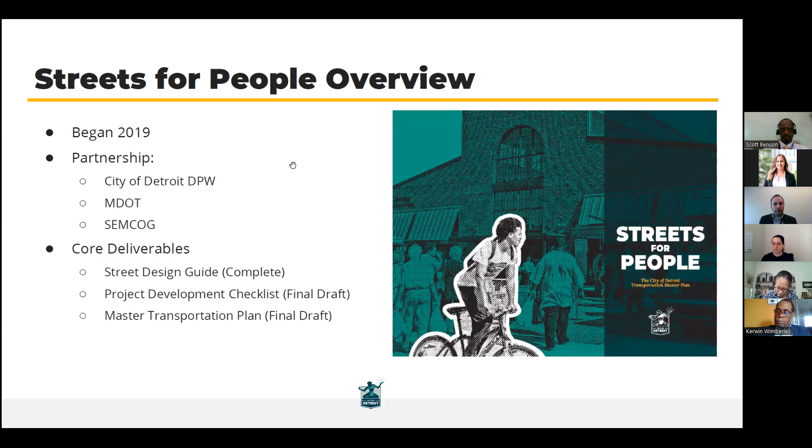The plan is divided into four main sections. First, establishing where the city of Detroit is going in terms of transportation and mobility, and where we are today—what has led us to the streets and rights of way we see every day. Second, where do we want to go? What have we heard from community members and stakeholders about what they'd like their streets to look like and how to use them. Third, how do we get there? What actions, recommendations, and efforts can be taken by various stakeholders, including the Department of Public Works, to make it happen.

Oh, did I see a hand raised? Oh, okay, sorry.

There were five core values established throughout this process. I won't read them all, but they're available on the website if you want to dig into how they were developed. They focus on safety, especially pedestrian safety, first and foremost; making sure our streets contribute to a prosperous economic environment; ensuring equity, dignity, and transparency in how we use our streets; making sure access is equitable so people of varying abilities have the same right and access to public facilities; and making sure the relationship between streets and public places supports health, healthy lifestyles, and access to our riverfront environment. All these components should be reflected in how we design, operate, and maintain our streets.

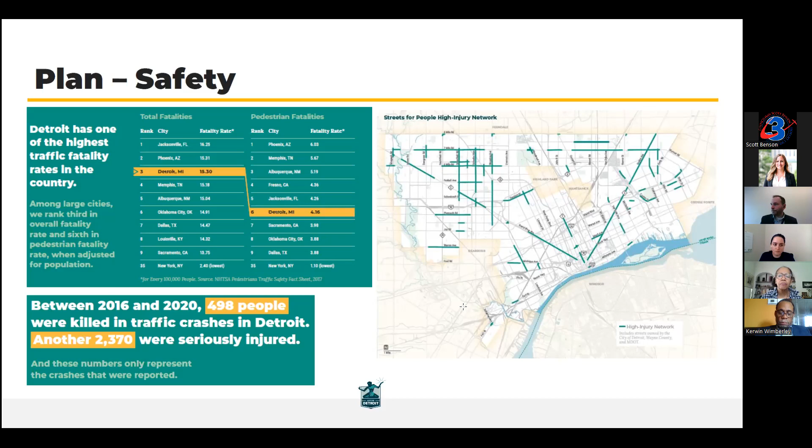The plan also identifies several ways of measuring equity and access, disinvestment, and opportunities to ensure we're putting investments in our streets and safety where the need is greatest. There's a fantastic analysis of where people live, how they get around, and access to transit. This comes up often in these conversations—there's a lot of opportunity to make sure people can access community resources where there currently isn't access, by enhancing and improving our transit services.

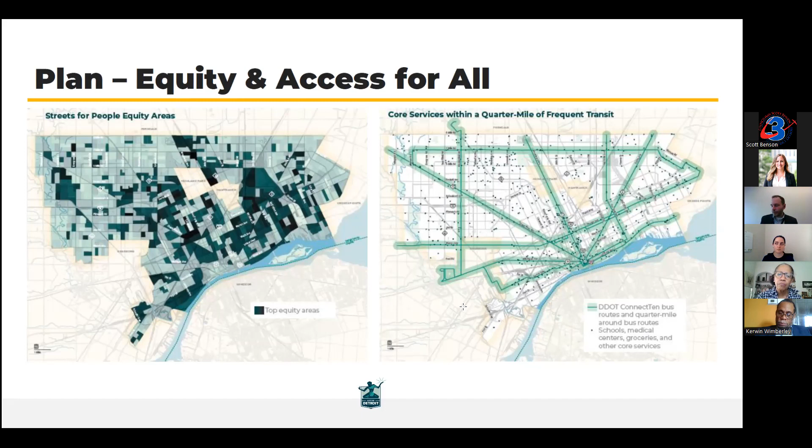I also want to note that the plan establishes a hierarchy, or typology, for streets and how they're designed. It identifies eight types of streets, and even though there's a map, it's not prescriptive—meaning a street of a certain type doesn't have to look a certain way. It gives us a starting point for navigating trade-offs for different street types, depending on intended use, surrounding context, and the neighborhoods they go through. As I get into the street design guide, I can give more tangible examples of what that means.

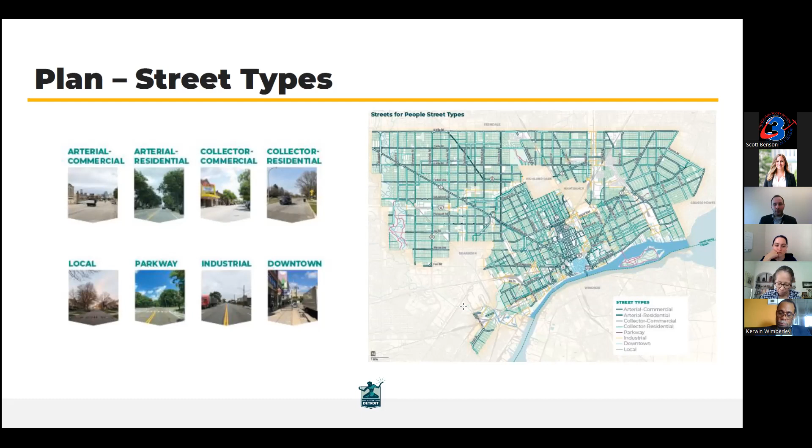I'm also excited that the plan identified a slow streets network. Some cities call them bicycle boulevards, others call them neighborhood greenways, but the concept is a traffic-calmed street—typically residential streets with already low volumes and low speeds—where improvements can make them places where families and people walking and biking can share the street with cars safely, over long strings of corridors. They often parallel a major arterial one or two blocks over, creating a leisurely environment while prioritizing people walking and biking. Think of it like the speed hump program you see today, but concerted with wayfinding and a connected network.

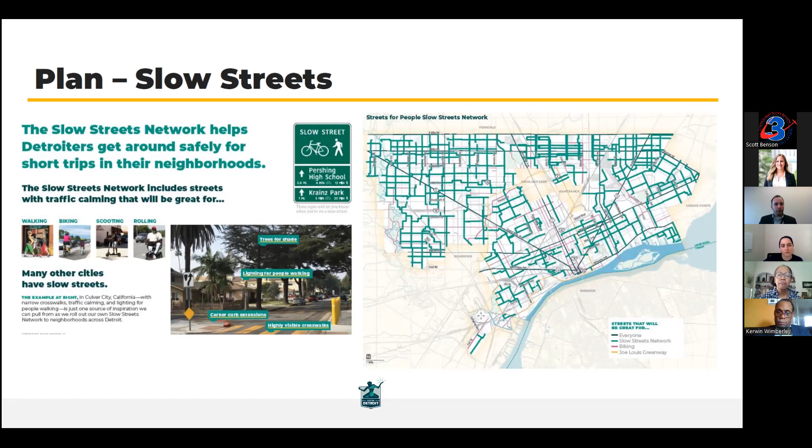Now jumping into the street design guide, I just want to highlight some excerpts and things, and just what you could find, or what you could see if you were digging into the guide itself. So the first chapter is really just an intro, establishing how the design guide aligns with the overall transportation plan, but then also how it can be used.

It makes sure the connection between how motor vehicles travel and the speed that they travel is directly correlated to the level of safety that people feel on a typical type of street. In terms of that process, it establishes the life of a project, like how you would navigate and use this guide to make decisions and share alternatives with community members that they can see are addressing the needs identified at the beginning of a project.

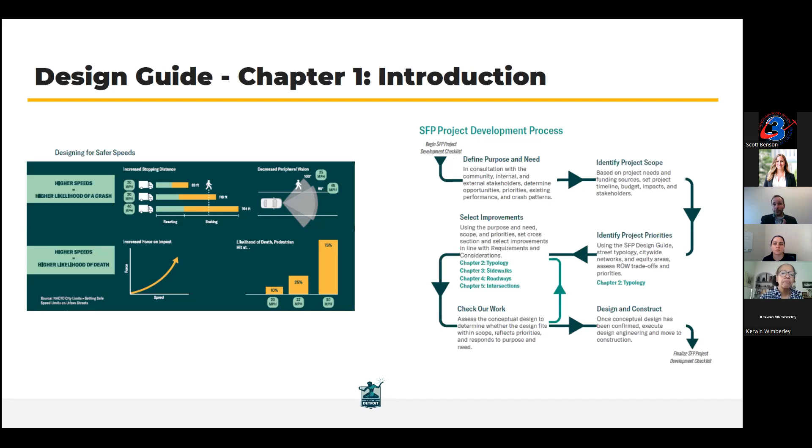It also establishes and gets into much more detail in terms of those typologies that I mentioned before. It breaks down each one of these 8 typologies and has basically a 2 to 3 page spread that shows the different interchangeable components of streets of that type. What are the priorities for a type of street?

As an example here on this page that's maybe a little fuzzy, it's showing an arterial commercial street, and the modal priorities for those type of streets—your starting point should be that it's a high pedestrian focus, pedestrian safety being a high priority because of that commercial nature. There's an opportunity, but maybe a lower opportunity than some other streets, for bicycle accommodations. High transit ridership, because of the traffic volumes, accommodating cars is still a fairly high priority for those type of streets, but then a medium priority for trucks.

Each one of those street typologies has a page like this that shows you potentially how to navigate that, the starting point for design. It also establishes, though you can't see it well with the fuzziness here, minimum, desirable, and maximum lane widths for the various types of modes, depending on that type of street. And I'd say they all err on the side of trying to be progressive in terms of aligning with best practices like NACTO, if you're familiar.

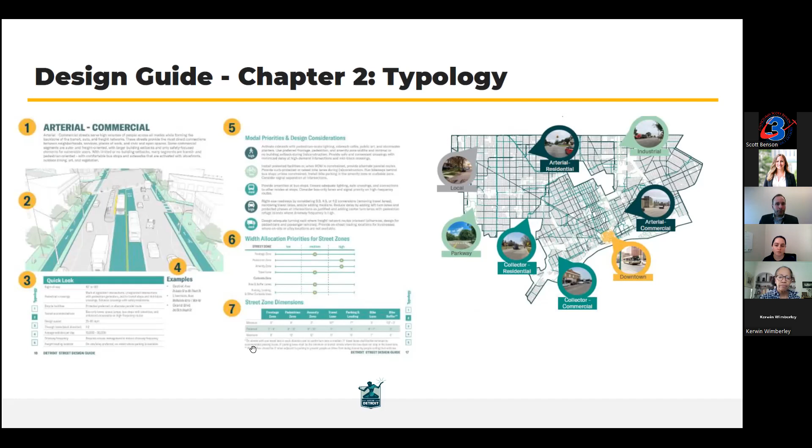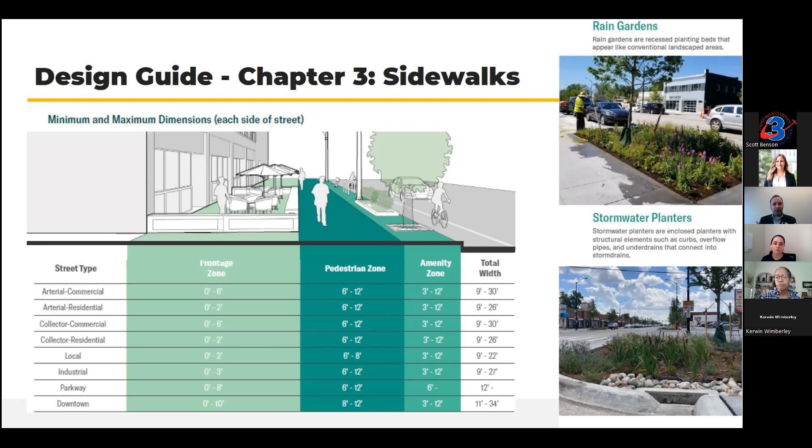The third chapter of the design guide really focuses on the sidewalk space of streets. These are just one or two excerpts from this chapter, but it establishes the various range of zones recommended for different types of streets, and how you could interchange some of those as you're approaching design. I wanted to make special note that it has a sub-chapter, a few pages on green stormwater infrastructure, and I think that's an area the Department of Public Works in particular could probably focus on implementing and making a higher priority in the near future as we implement this design guide.

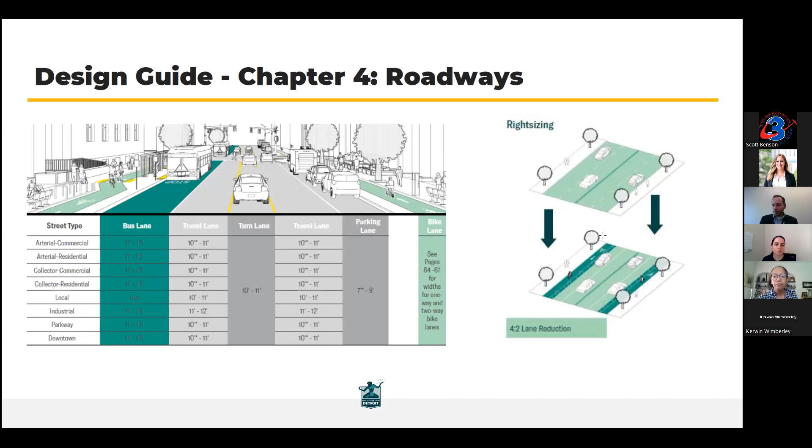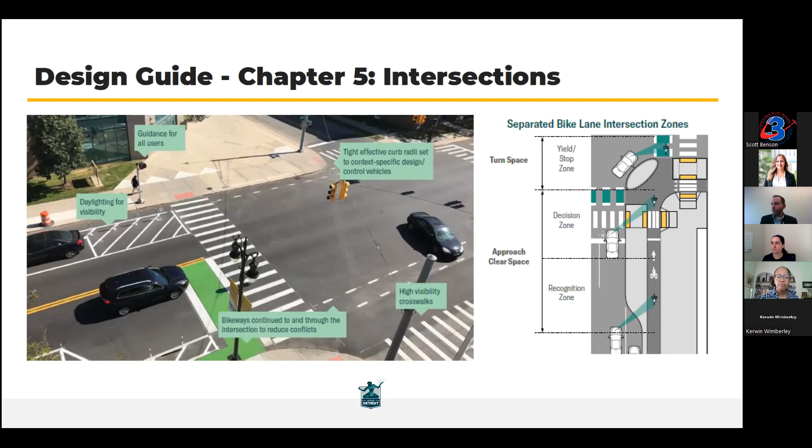With that, I know I was rambling very quickly, but I want to give enough time to really have some discussion. So any thoughts or questions?